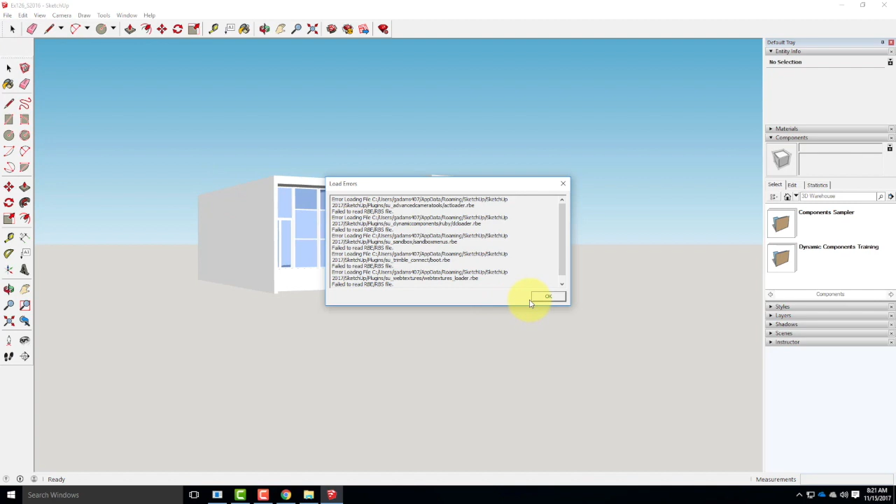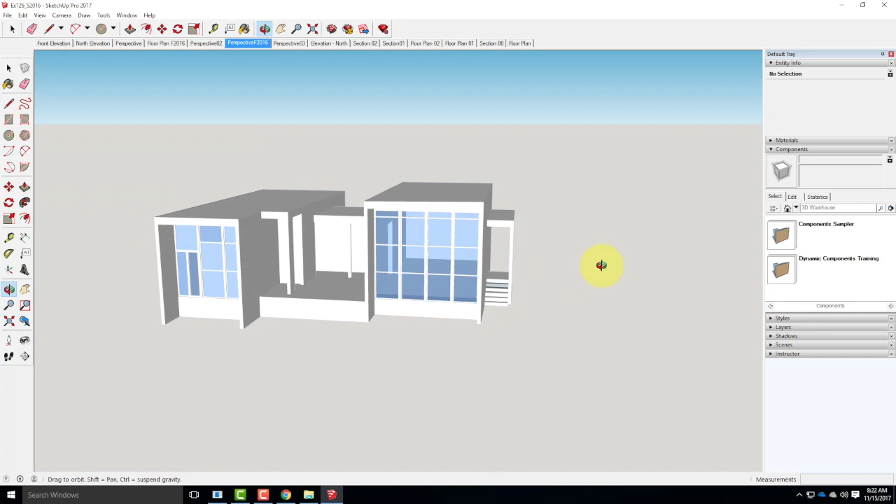Okay, so I have my SketchUp model. I only modeled the front side here because that's the elevation I'm going to be working with. The back side is not done, so you get what you get. Anyway, I'm going to start setting up an elevation view of this particular building.

So obviously I can get in close and say, okay, well that's kind of like an elevation view of this building. Let me switch the styles here into hidden line, just so you can see it a little bit easier. Okay, so there's the hidden line view of this.

But notice that this is technically still in perspective. See how these lines inside the building recede back? Likewise, that's receding back toward a point in the center. This isn't an elevation view. This is still a perspective view.

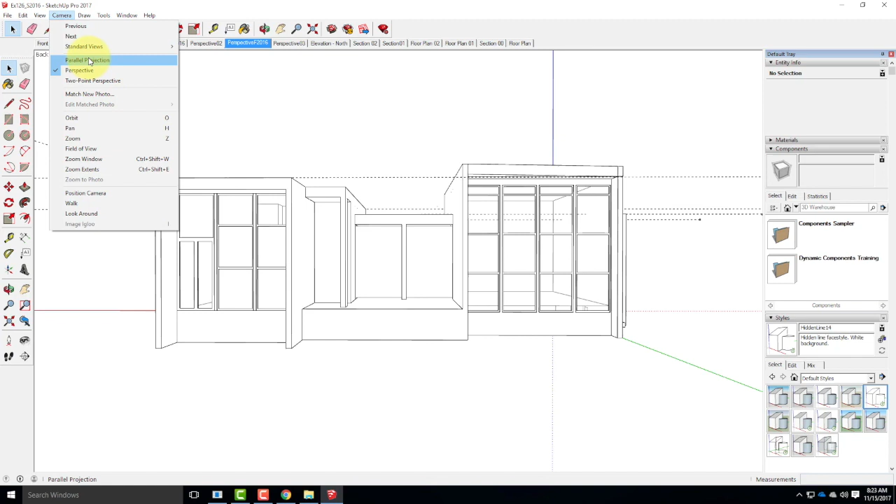So I need to change the view from perspective into parallel projection. I'm going to go to the camera menu and come down here to parallel projection instead of perspective. When that switches, you'll see your building, rather than having lines recede, everything is straight. Does that make sense?

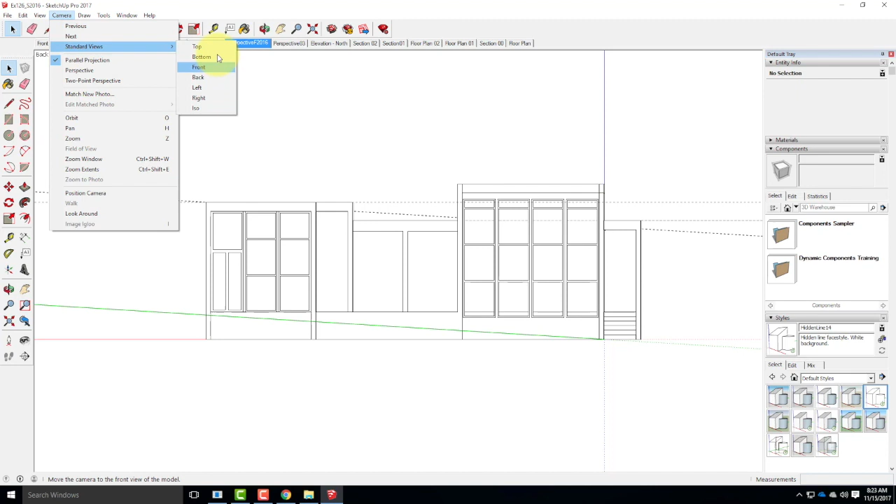I still need to get this lined up so that it's perfectly in elevation view. To do that, I could keep moving it and moving it, and that's obviously close. But it's faster if I go up to my camera, go to standard views, and pick one of the standard views. It's probably the front—nope, it's the back. Standard views, we'll go front. No, sorry, back. There it is, so there's the view that I want.

And when I'm in this view, it makes it much easier to have it perfectly centered in elevation. So there's my elevation view of this side.

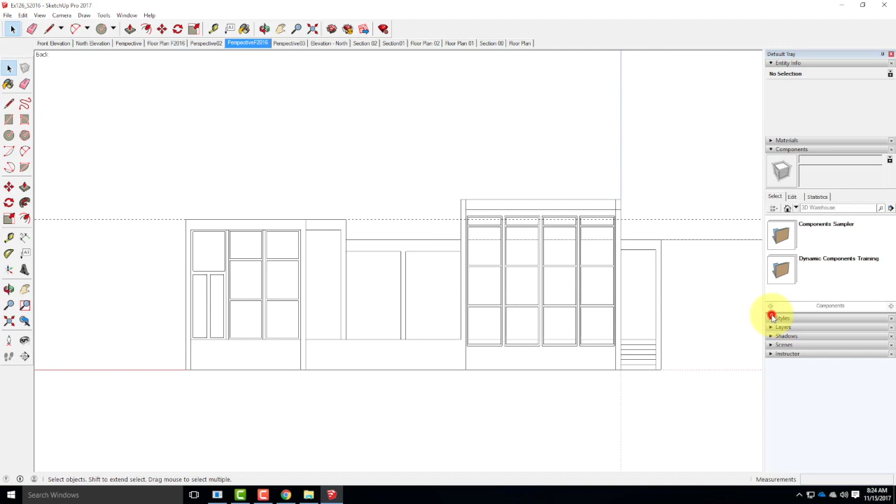Just like I did before, I want to make sure I save this scene so I can reuse it over and over again. You see up at the top I have a bunch of scenes already set from previous classes. I'm going to go over to my scenes window here. Remember, if you're not seeing this, you can go to Window, Default Tray, and then turn on Scenes.

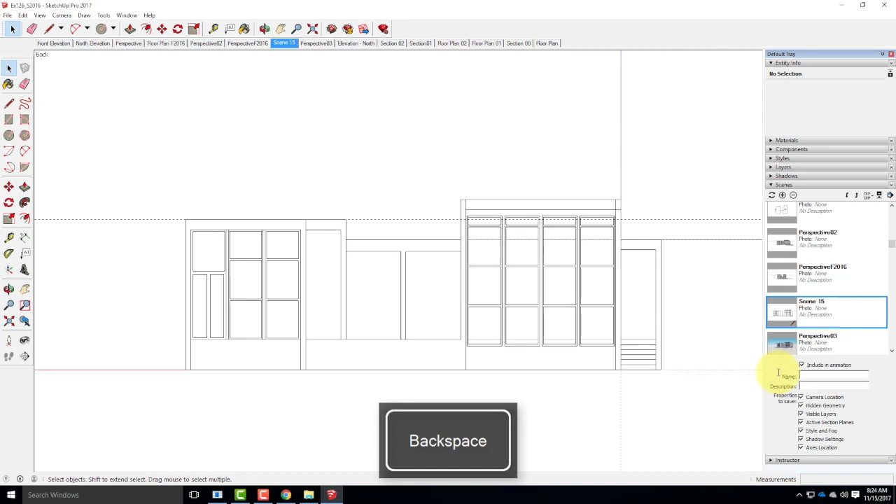I'm going to go ahead and save this scene, and this scene is going to be front—what is this? This is the north elevation. Okay, so I give it a little name so we know it's named. There it is. The advantage here is, remember, I can always return back to this view, and it's important that we keep the same view when we do all of our exports for this. So that's saved as a scene.

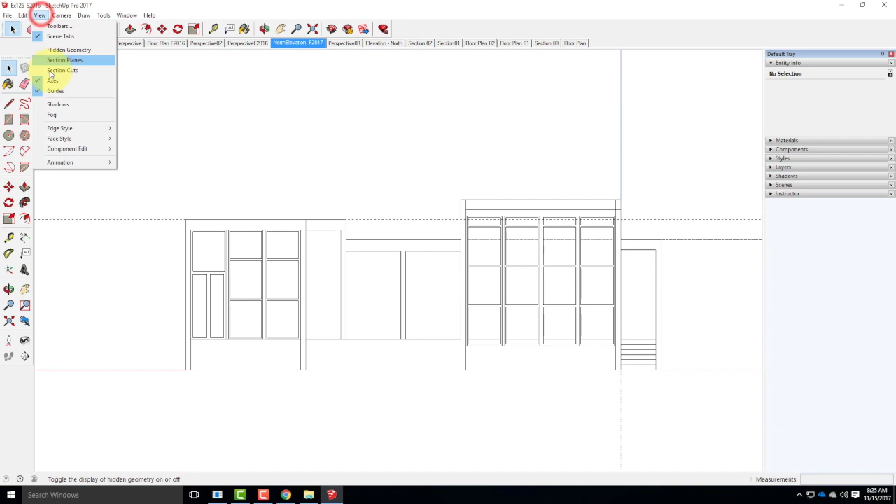I want to get the original line drawing out, but I want to turn off things like the axes—I don't need the red and blue lines, all of that can go away. So I'll go to the View menu here, and I'm going to turn off my section cuts. I'm going to go to View, turn off my axes, and turn off my guides, so that all I have is this very basic line drawing.

Once I have the line drawing, I'm going to go ahead and export this line drawing. I'll go to File, Export 2D Graphic. We're going to save this as a JPEG, and I need to put it into today's folder.

All right, this is—and I'm going to add underscore 'lines' to that so I can keep track. This is just the lines. I'm going to click on my options first, make sure my view size is rather large—in this case I chose 5,000 pixels wide, and the height is whatever it is. I'm making sure I'm on best quality. I'll say OK, and then I'll go ahead and click on Export.

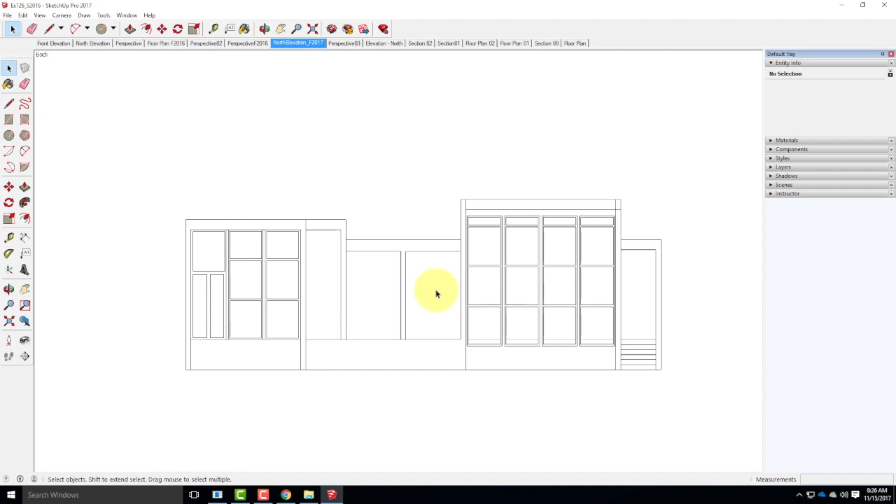So it then exports my line drawing. At this point, I'm going to go through the rest of the export options. We've been through this strategy before—you guys did it with the Francis Ching Cube House.

I'm going to go into my styles here, move over to the Edit tab, and go to the Faces, or Face setting, and I'll turn on X-ray. You don't really see much in the elevation view—there's a little bit there. I'll go ahead and export this anyway.

Export 2D graphic, and this is going to be named X-ray. Export.

Now the next one, I'm going to turn on the shadows. I'm going to skip the guides because the guides didn't do much for me—I say in the tutorial that you should do one for guides, but I didn't use guides, so it's kind of a moot point. I'm going to go ahead and turn on the shadows, so I go to View and then Shadows.

If I'm not seeing anything, I may have to go and adjust the time of day. Let me go into Shadows here and see if I can get something to show—did it not? How convenient, I'm getting no shadows.

There you go, I was on X-ray still. I had to turn off X-ray. So X-ray's off, now I can work with my shadows. And I'm going to adjust things.

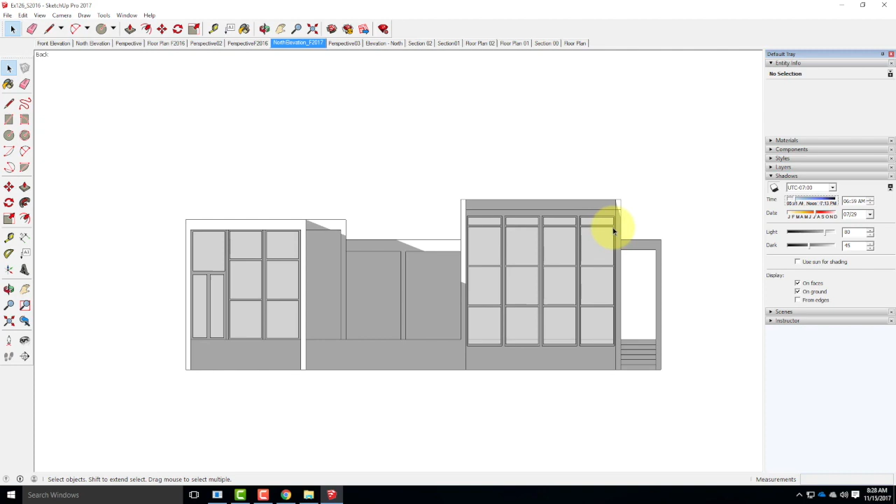But remember, I don't want the lines exported with the shadows. I just want the shadows. So I'm going to go back to my styles here, go to my edge settings, and turn off edges so that I end up with just the shadows being exported. So this is only the shadows.

I'll go to File, Export, 2D Graphic, and I'll call this shadows. And I'll export. Remember, I haven't changed the view at all. It's exactly the same view, and that way they'll line up when I bring them into Photoshop. It's really important not to change that.

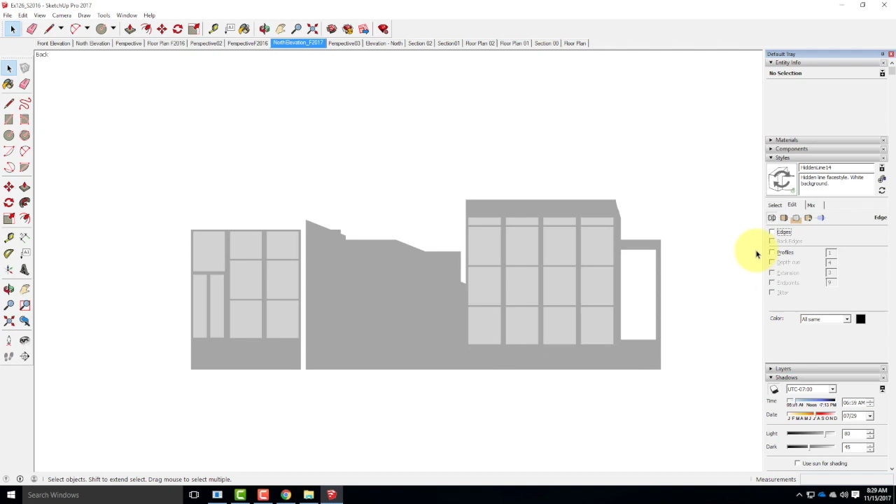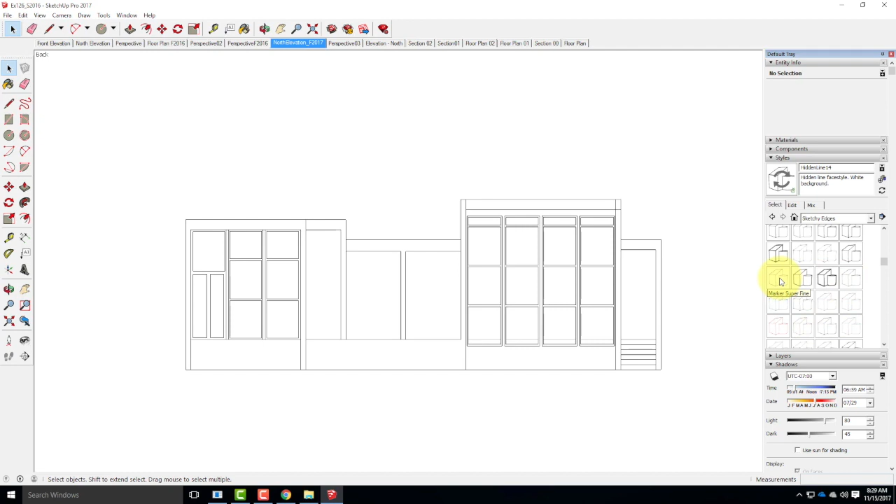So we'll go ahead and turn the edges back on now, and we can turn the shadows off. I'll uncheck the shadows. And now I'm going to go into my Sketchy Edges style, and I'm going to pick a few as part of my export. The pen gray was a good one, if I can find it. Of course, I can't find it.

Remember, with any one of these, if you find one that you like and feel is a good one for you, you can do that export as well. There's the pen gray, there we go.

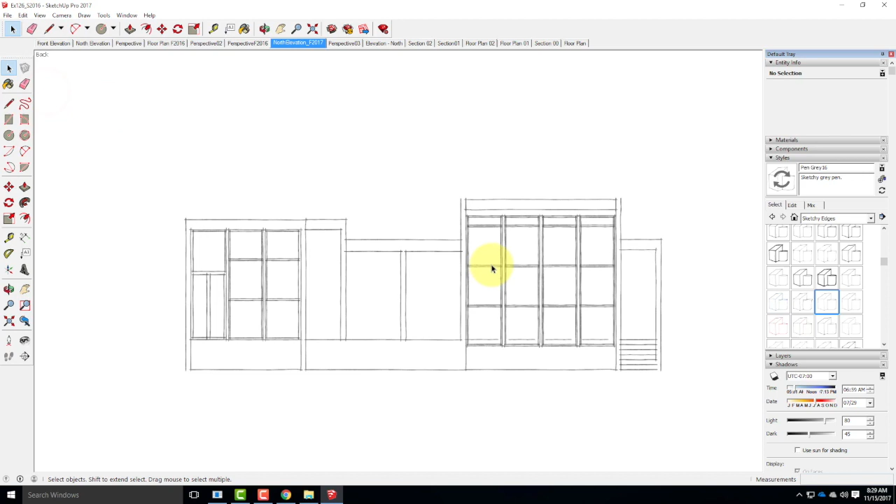I'm going to once again turn off the section cuts, the section planes, the guides, so that I'm back to just a line drawing. This is the pen gray, so I'll go to File, Export, 2D Graphic, and I'll call this pen, and I'll click export. Feel free to experiment if you want to try a different look.

There's nothing wrong with that. I've also found that the airbrush with endpoints works nice, even though it looks heavy here.

Once again, I have to turn off the section cuts, the section planes, and the guides. So I'm down to here. This is airbrush. I'll go to File, Export, 2D Graphic, and I will add airbrush to that one.

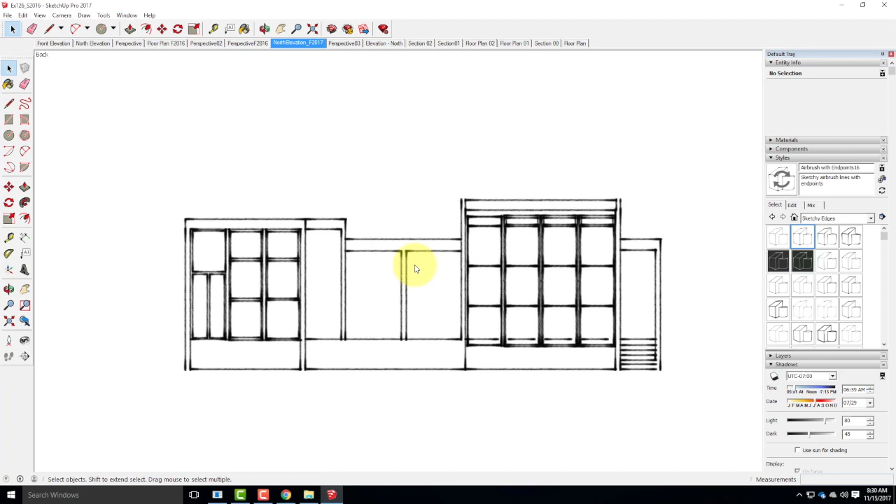So now I've gone through and created all the exports that I need as part of my design here. Now it's time to bring those over into Photoshop and stack them up. So I'm going to go ahead and close off SketchUp for now. I can always come back. I saved the view. If I need a new export, I can do that.

And I'm going to go ahead and open the first image in Photoshop. So let me open up Photoshop here. I'll go to File and then Open. I'll go to today's folder, and I'll take the lines first. There's the lines, and I'll say Open.

Now with all of these, I know it's a little hard for you guys to see this because it's a little faint. But with all of these, remember, I want my background unlocked. So I'll right-click and say Layer from Background. But I also want to name this. So this is my lines.

And for your purposes, I'm actually going to duplicate the lines and change it to multiply just so that they show up a little darker on the screen. You don't have to do that, I'm just doing it so that you guys can see it a little bit better. And I'll call this one Lines 2.

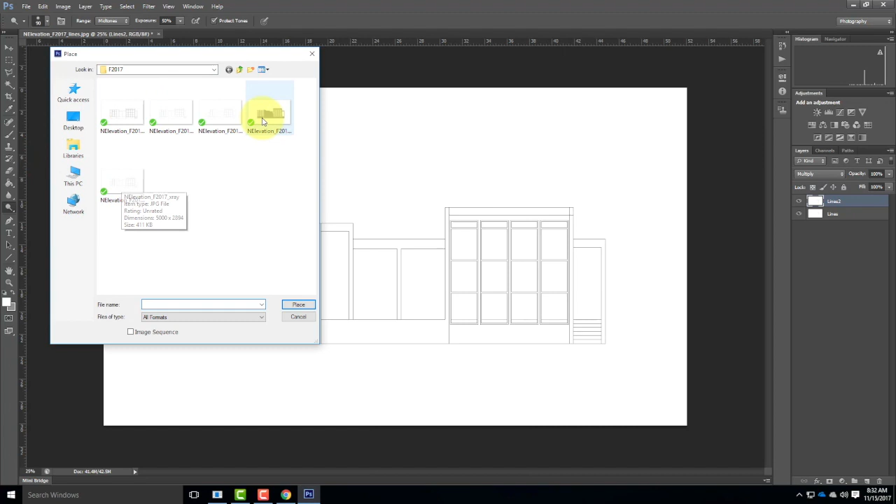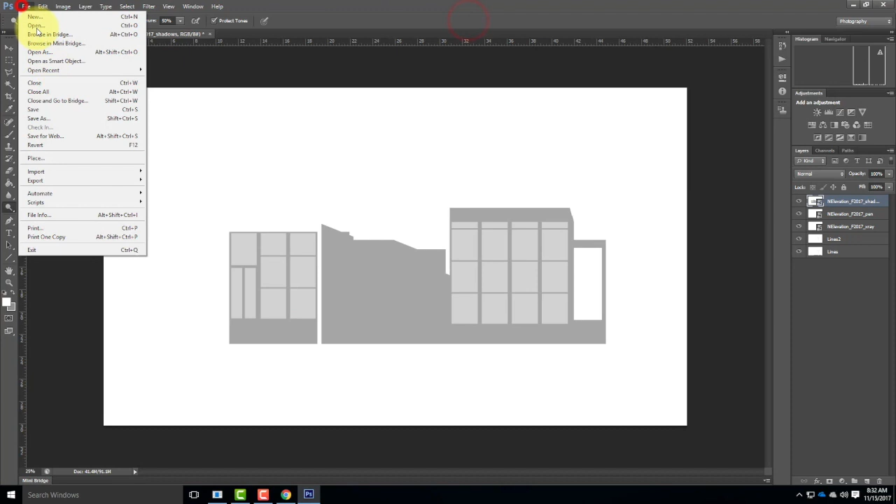Then I'm going to bring in the other drawings. So I'll go to File and then Place, and I'll bring in each of the rest of these. We'll start with the X-ray, I'll place that in. I'll go to File and then Place, and I'll drop in the pen. Yes, you will have to select place every time. Here's the shadows, and the last one was the airbrush.

There we go. So on each and every one of these, after I've finished placing them in, I'm going to take the layer and change it to be multiply. And each time that I do that, we'll see through the white part of the image to the dark part of the image. So even that by itself, you guys can see the building really well.

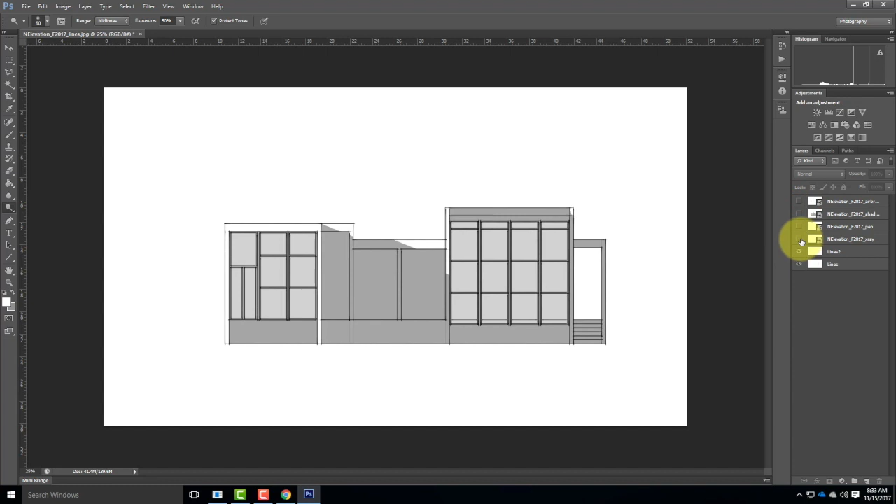But I have control, just like I did with the Francis Ching example, I have control of individual parts of the building. So let me go ahead and turn all of these off for just a second, and I'll work with just the lines layer there. The first thing that I need to do in an elevation is establish where the ground is in the elevation. So I need to draw in where that ground plane is going to be.

So I'm going to create a new layer. I'll click on the new layer button here. It's going to be at the very top of the layer stack, which is where I want it to be. I'm going to rename that to be ground.

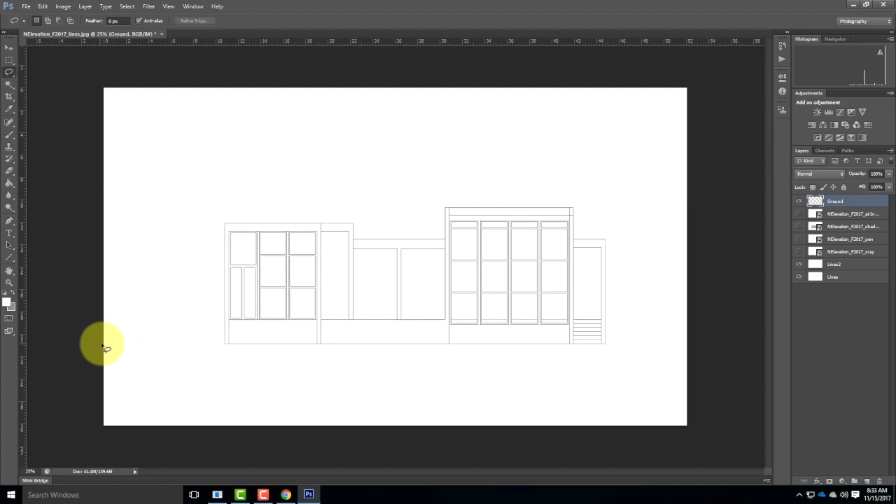And then I am actually going to paint in where the ground should be. You can do this using just your brush tool. I tend to use a lasso tool to start, just to make a selection, because this lasso tool allows us to have a little bit of undulation as we go along. So I'm going to move my way along here, and then I'll eventually drag all the way around, which makes a selection. I dipped a little bit by accident below the bottom of my building.

I can add to the selection by holding down Shift. Notice that the lasso adds a little plus sign next to it, which means I'm adding to it. And I can come back in and say, you know what, I wanted to include a little bit more of that part there. Maybe a little bit more right in there. So I'm just adding to the selection.

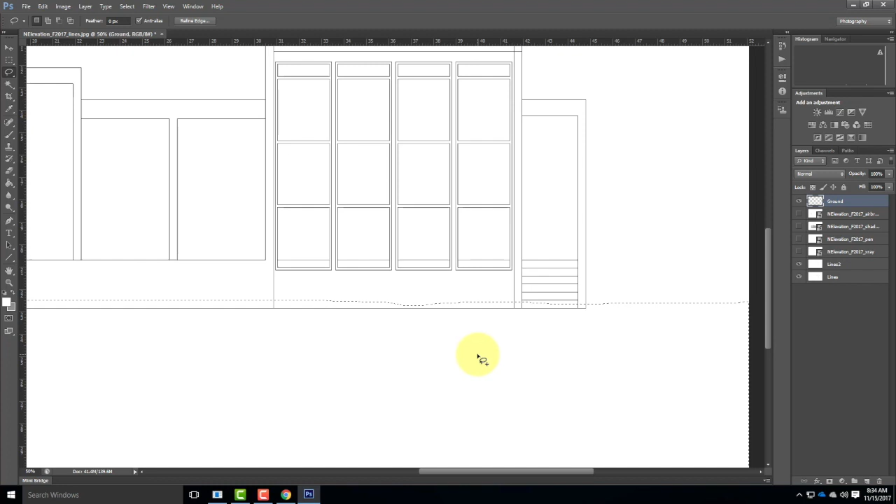If I press Control 0 to see everything, now I'm going to paint in what I want this ground to look like. And there's a couple different strategies for the ground. I could start with a dark gray or a black, or I could do the inverse where the ground is white. It depends on whether you have a colored sky background or not. So I'll end up showing you both as options.

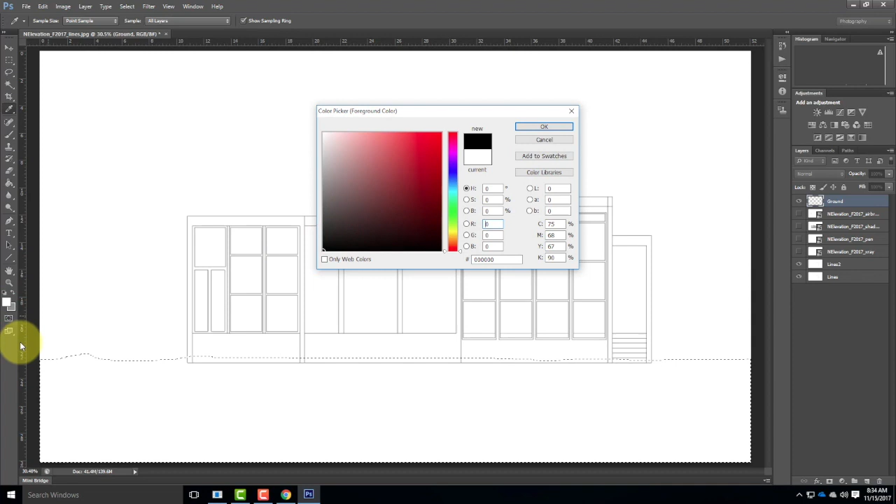I'm going to start by painting this in black. It ends up being a little easier to see initially in black. So let me pick black as my foreground color. So there's black as my foreground color. I'm going to use the paintbrush tool right here. Right now my brush is really tiny, so let's make that brush size go up a bit. Remember, I could also use the bracket keys on my keyboard to make that brush go up a bit. And then I'm going to paint in black that ground.

The advantage of doing it as black is, remember, I can always do an adjustment on top of that and skew it towards gray. I can lighten that after the fact. And I can again show you that as we go forward. So that's nice, I have a little bit of what the ground would be like. And again, I interpreted where the ground would be a little bit. It's covering up the bottom of my building rather nicely. But it would be nice if there was a little bit more to the edge.

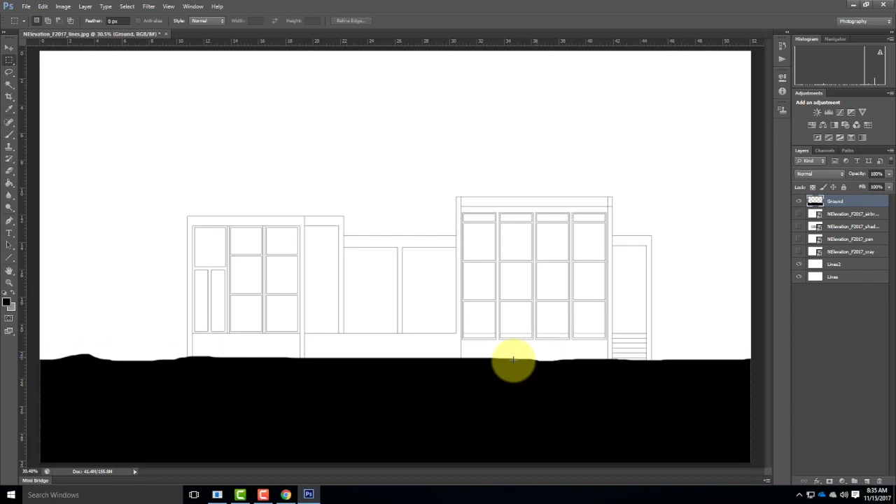And I'm going to use a grass brush using a clone stamp to fill in that edge so that it's a little bit softer against the front of the building. So let me zoom in a bit. And I'm still working on that ground layer over here. I'm going to go to my clone stamp tool. And it's important you use the clone stamp tool, not the brush tool. I'll use clone stamp, and I'm going to make my brush be the grass brush, which is number 134 here.

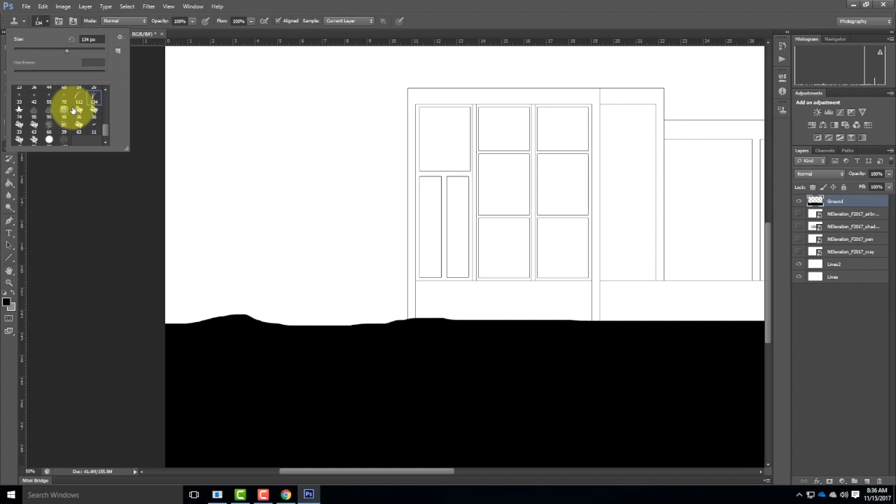It's possible that I'll have to adjust the size of the brush. I'm going to go ahead and hold down the Alt key, the Control key, the Alt key - it's the Alt key - to copy from here, and I'm going to move up toward the edge. So we can see my brush now as I get a little bit closer. Yeah, it's about right in its size. And we'll start filling in the grass along that edge.

Remember, you use spacebar to pan. As I get toward the edge here, I may have to reset where I'm copying from. This is all black, so it's easy to copy from. I'll copy from a little bit further over so I can go right off the edge there. Then I'll work my way over a little bit more. I'll reset, I'll hold down Alt to copy from, and we'll keep working right in here.

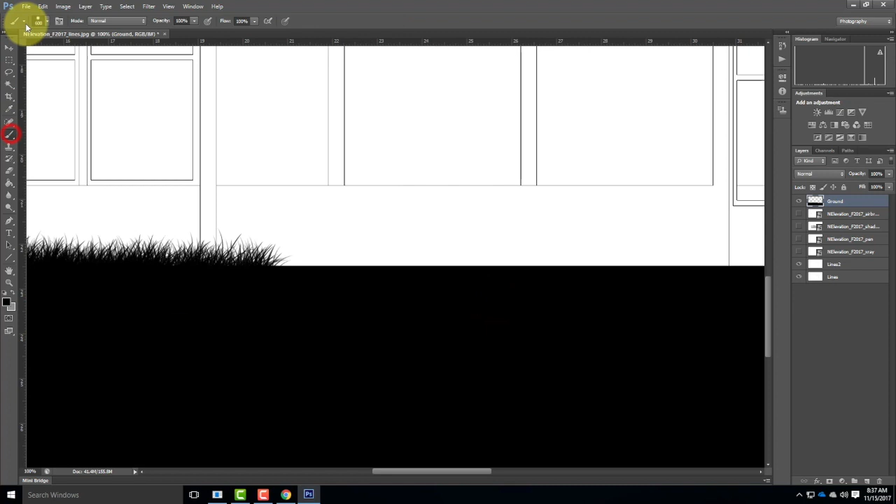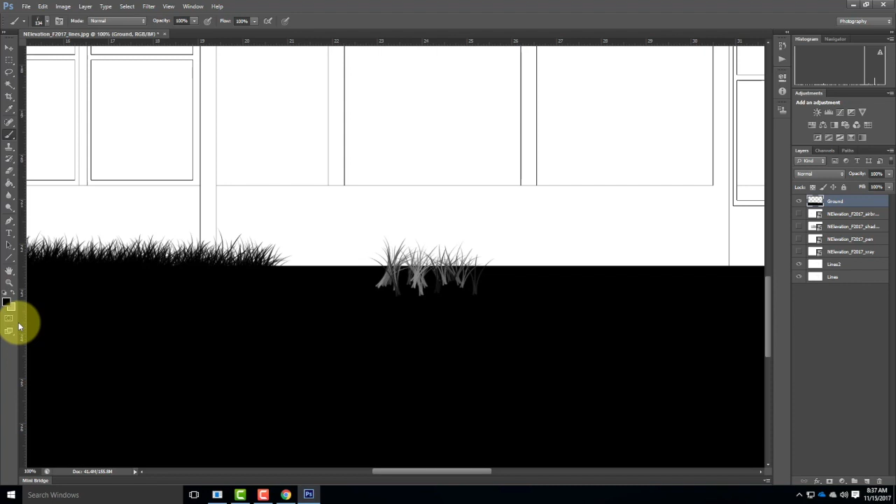Are you doing copy from instead of just black? I'm doing a clone stamp because that's copying the exact color. If I did a regular brush, I'll show you this - if I did a regular brush with the grass brush here, when I went to paint it, you'd end up with these varying colors. That's how the grass brush works, because it's trying to make it look like, if you pick green, it would look a little bit more realistic. I'm picking, the colors that I have are black and gray. If I pick greens, it would try to create fake grass from those greens. I don't want that variance in colors, so that's where the clone stamp comes in, which allows me to copy an exact color. So I'm only working with black, and I'm copying that black in.

One other thing I should point out while I'm finishing up this: if you watch videos from previous semesters, it's entirely possible I'll do these steps in a different order. It just happens to be this is the order I'm going in today. It doesn't really matter what order you do the steps in, because you'll end up with the same result.

Let me continue working my way along here. Remember, as I get to the end, see how my copy from ran out of space? So I got a hard line right there on the edge. I need to come back, copy from over here, and finish off that particular section.

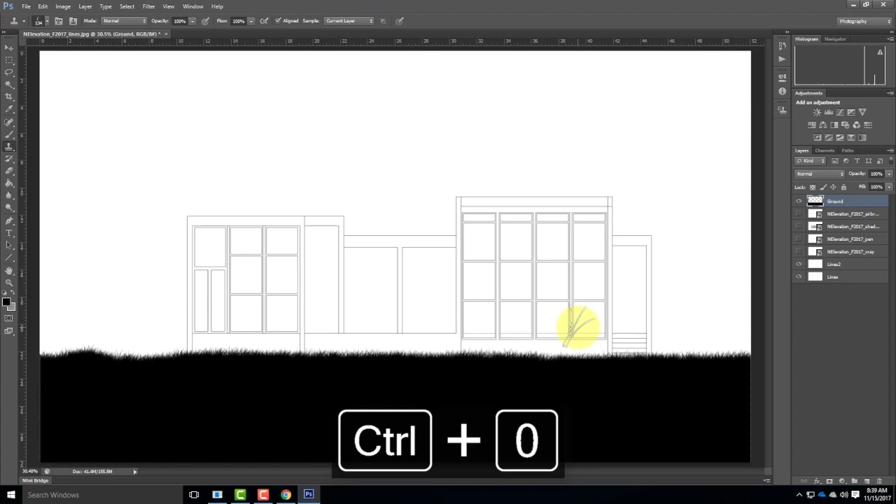OK, so now if I press Control-0 and look at this, we see I have a nice, strong ground presented for me, which is obviously the idea. I did not change the ground to be a multiply layer — it's just a normal layer, so it's on top of every other layer and I can hide stuff behind the ground. So when I go to put a sky in, for example, I can hide the sky behind the ground. So the next piece of this is to put some kind of background as part of this image.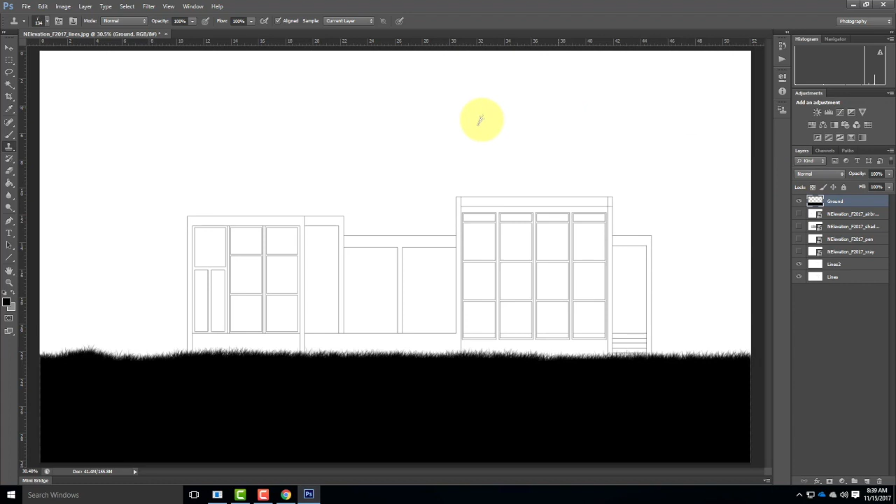So I need to actually go find some kind of background image. If you were actually doing this project, you'd go to the site and take your own images, which would certainly help. For our purposes, we have to find one online. So I'm going to do a Creative Commons search.

In Flickr for Yosemite — Yosemite Meadow or Valley or something like that is not a bad place to start. Remember, a lot of the work in doing this is finding the right image and figuring out where the right image belongs. Something like this, while it's a really beautiful image, doesn't work for my elevation.

There's a building in the background. There's a fence randomly through the center. If I put this behind my building, it would look funny. The scale's wrong. So I need to be selective about where I'm picking and what's going to show up in my particular view. This image would work just fine.

A lot of times when I'm doing this, I'd go through and just open them in new tabs as I look through a couple pages of images, trying to find which one would work nicely. In our context, I can pay a little attention to my shadows, which is not a bad idea.

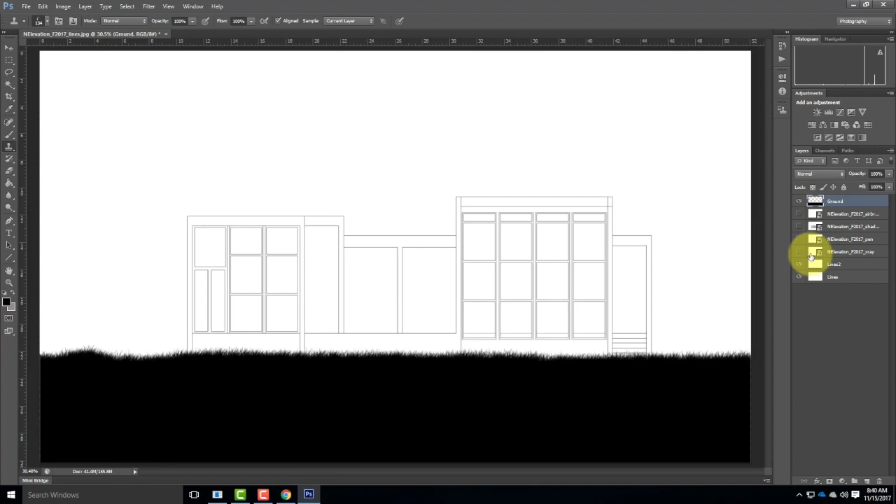So if I look here and I look at my shadows — where's my shadows? I should have renamed these layers. There's my shadows. I've got light coming; the sun would be a little bit behind the building over here, shining down.

As I'm looking through my images, it would be helpful to have a general understanding. This image, for example, has the shadow coming from the opposite side. I could flip the image — that would work. But it's good to be aware of that sort of thing. When we get to the perspective, it'll be far more critical. So this one, for example, does have the shadows coming from the right direction, so that might not be a bad strategy.

I'm going to look through a few more here. One of these ought to work. So where was the one? OK, so this one had the shadows coming from approximately the right direction, so we'll see how this one works. This obviously isn't exactly the site — I'm picking something that's close. So let me go ahead and download this.

Oh, the size is really bad here — it's too small for me. So let me move on to a different one. Let's see what the size of this one is. This size is pretty decent.

In this particular view, it's going to be a little tricky because this is looking down valley slightly, and I've got a bit of foreground grass, so I have to make sure I can hide all of that. So I'm going to give this one a shot, and we'll see if it ends up working out for me. It may not — that's one of the things you have to be aware of when doing this: sometimes you'll put an image in and it might not really work. You need to try a different image.

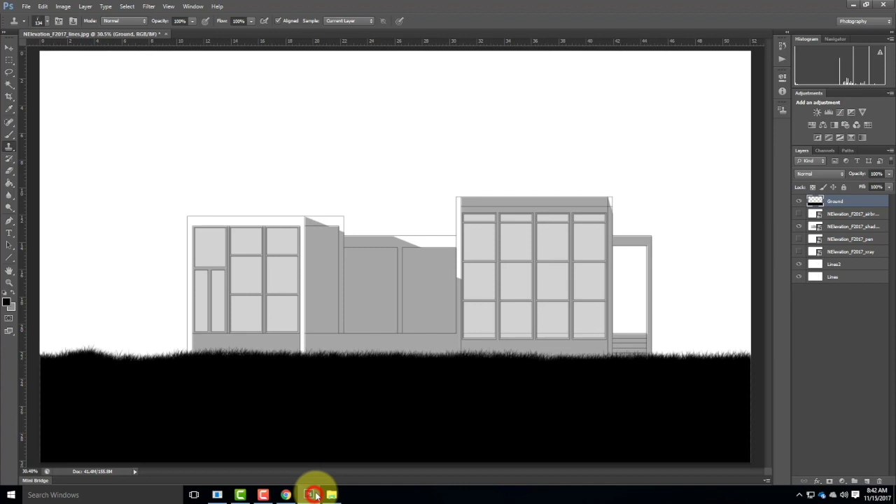Let me paste it. Here we go. I'll jump back to Photoshop, and I'm going to bring that image in. So I'll go to File and then Place. There's my image. Let me zoom out just a little bit. I'm going to have to make it a little bit bigger.

So I'll hold down Shift to keep the image in proportion, like so. I also want that layer to be below the ground layer. So I'll go ahead and commit to the scale, and then I'll make sure that it's below the ground. And then I need to work with the image to figure out where it belongs.

As I'm looking toward this particular piece, so maybe somewhere like that, it might work. We'll give it a shot and see. It may feel a little awkward because it's looking down.

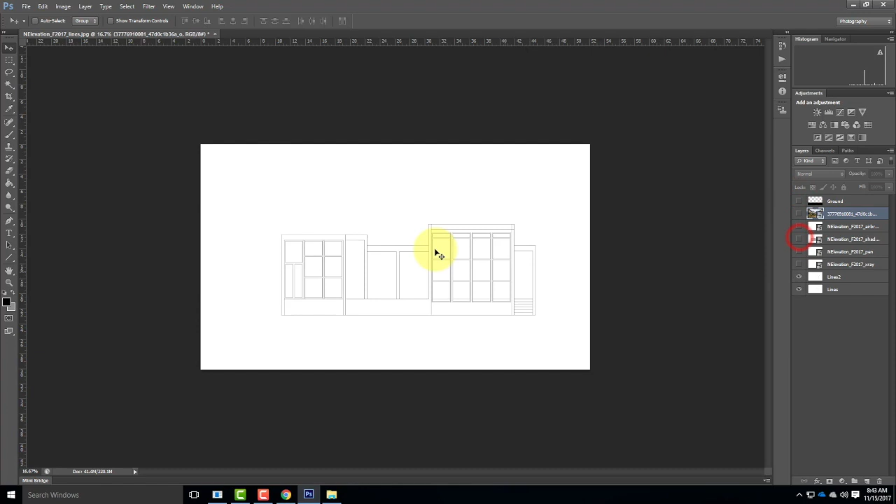So once I have this in place, I need to go in and find my building again. Let me turn everything off, and let me turn the ground off so that I'm back to just my building. I'm going to select, using the magic wand—make sure I'm on my lines layer here—the background. So there's the background. I have one piece of the building where I can see through, this entry here. So I have to make sure I include that piece in the background. So I have everything here selected.

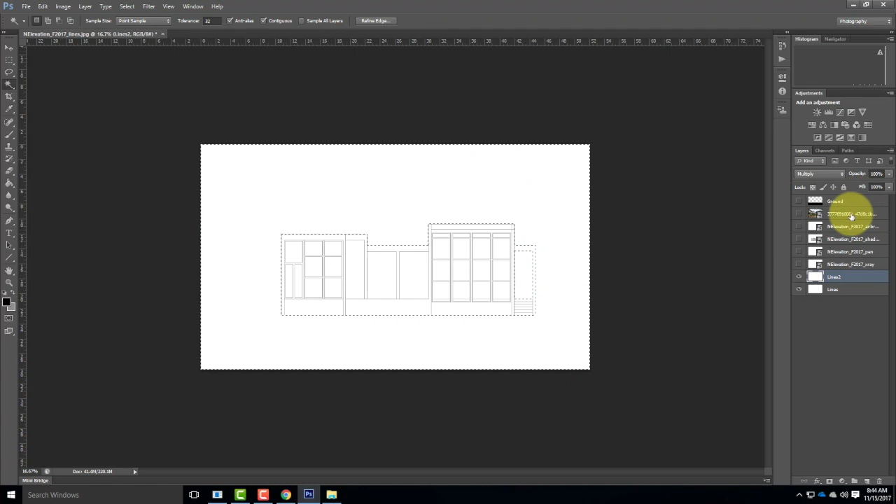If I go back to the background image here, I can do two things: I could just delete the inside part out of the background image, or I could create a mask. So I have the selection already made, so I'll go ahead and create a layer mask on that, which masks off that part of the background image for me.

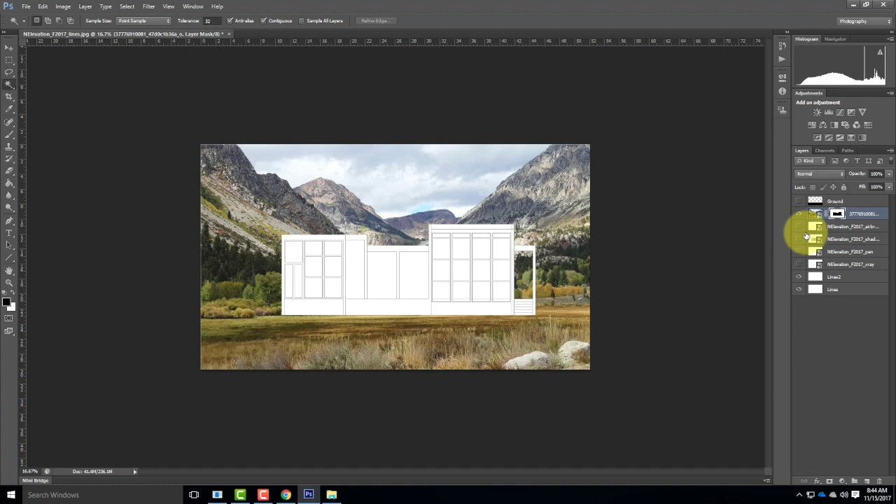Now if I were to turn back on my ground, we can see what it looks like with the building in its context. To me, it's not quite right. The perspective just isn't working for me. And this is where you have to do these kinds of edits—you have to decide, is it working, is it not working? So I'm going to try a different background image and see if I like it better.

So let me come back over here and try this one. I think this one will work a little bit nicer. So let me go ahead and download this one in its full size.

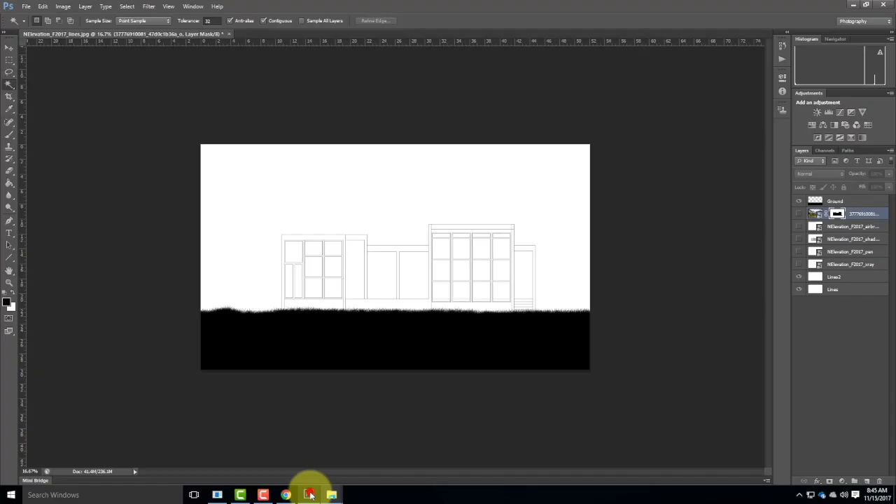And let me copy it. There it is. I'll come back to Photoshop. I'll go to File and then Place, and I'll bring in that other image. This one already feels better.

Make that a little bit bigger. Make that a little bit bigger like that. I'll commit to it.

I can take my mask. I can hold down Alt, and I can copy the mask from one layer to the other because I already created the mask, and we can see what it looks like. Maybe before I do that, I'm going to make a little adjustment and bring that down ever so slightly.

More about like that. A little bit higher. About like that, I think. Then I'll hold down Alt and copy this, like that. So now we're seeing the elevation in context with the building and the ground.

Okay, this starts to feel better. It's probably because the grass in this is about the right length. It's starting to feel like it belongs as part of the elevation view. So now I have that established and set up.

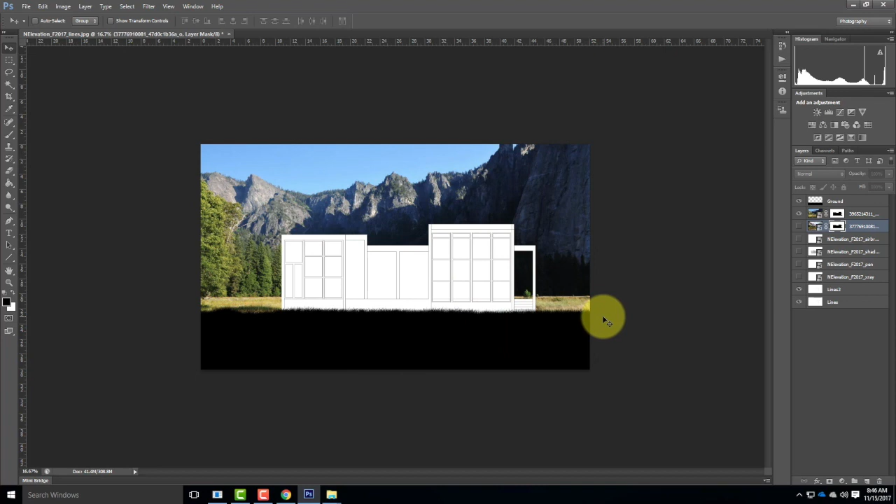I have the background. Remember that I can choose to fade the background or increase the transparency in the background. If it's oversaturated, I could turn the background to black and white. I have a lot of flexibility with what happens to the background. For right now, I'm going to leave it in color and then make an evaluation a little bit later on.

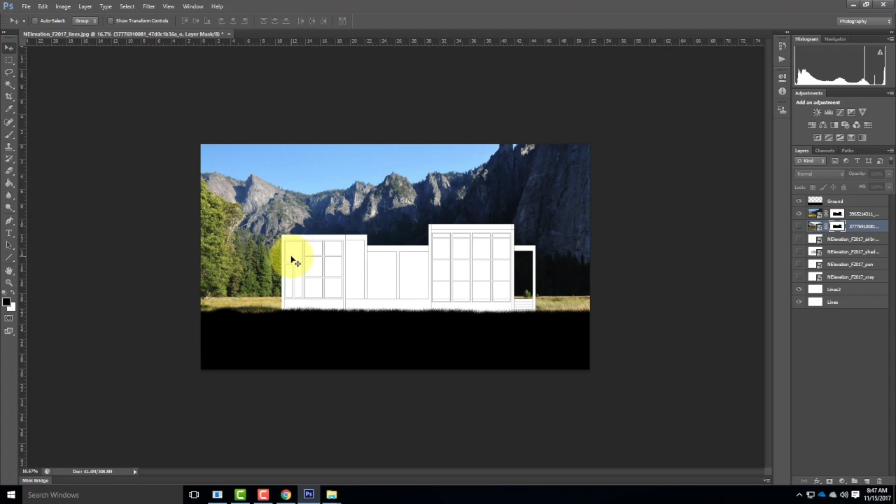So the next piece in this is I have to start to distinguish what's happening to the windows. And I think the next place that would be appropriate would be to work on the windows. So let me zoom in here a little bit. And I'd like to put some kind of a sky reflection into those windows.

So first off, I need some kind of a background cloud scape or something to work from. So let me do a Creative Commons search for high cloud sky. I don't want too puffy of clouds. If you're a cloud expert, you probably could type in the right type of clouds, but I'm not a cloud expert.

Something like that might work. So I'll go ahead and download this image. Copy it. And I'm going to put it into today's folder.

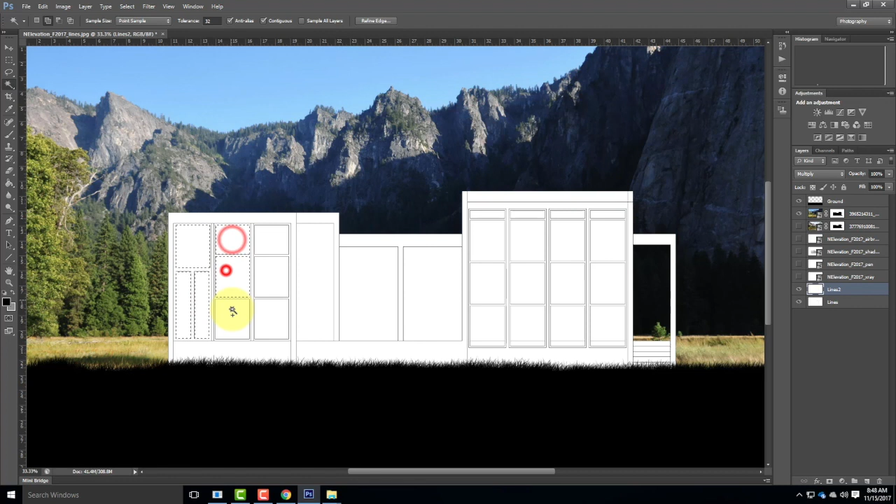And now I need to drop that image into all the windows of my building. So if I switch to the lines layer, I can then use the magic wand, and I can go through and select—I'm holding down Shift right now—all the windows that are in my building.

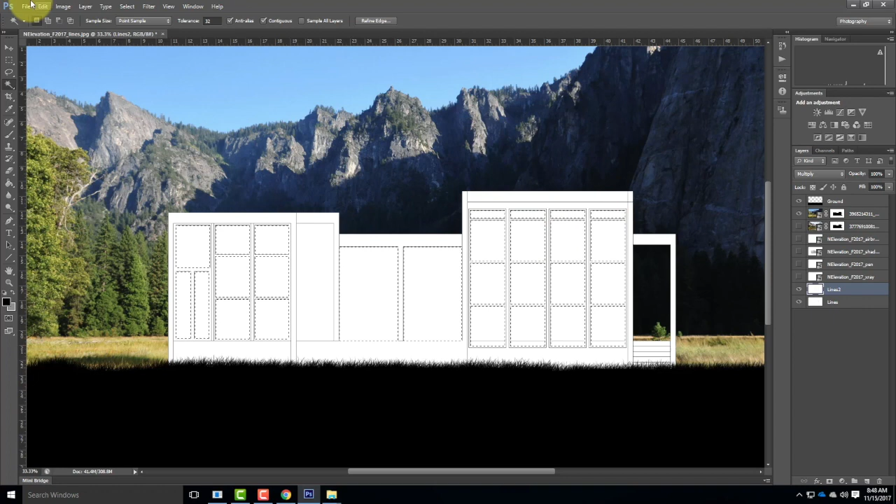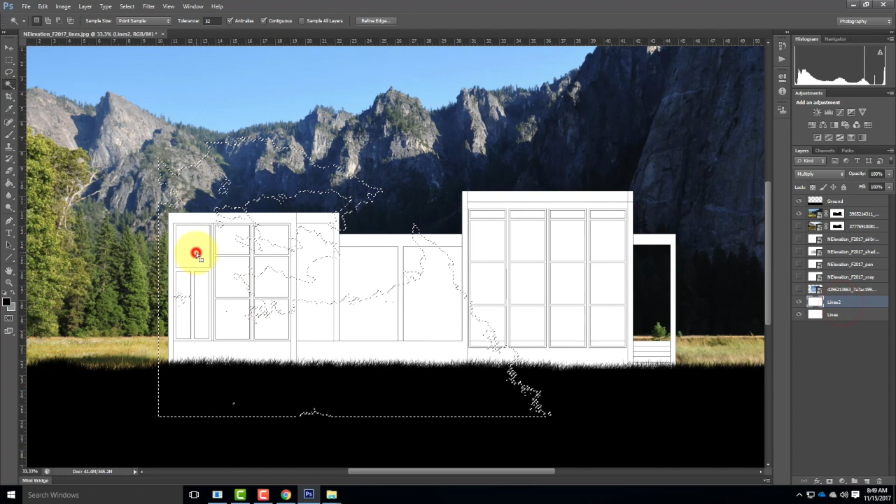Okay, so I have all the windows selected. I'll go to File and then Place, and I'll drop in the sky. Make that a little bit bigger. Like that, or so. Then I need to make a mask on that layer for all of the windows. I shouldn't have made my selection yet, sorry, that was a little early. Let me go back to my lines and quickly select those windows again.

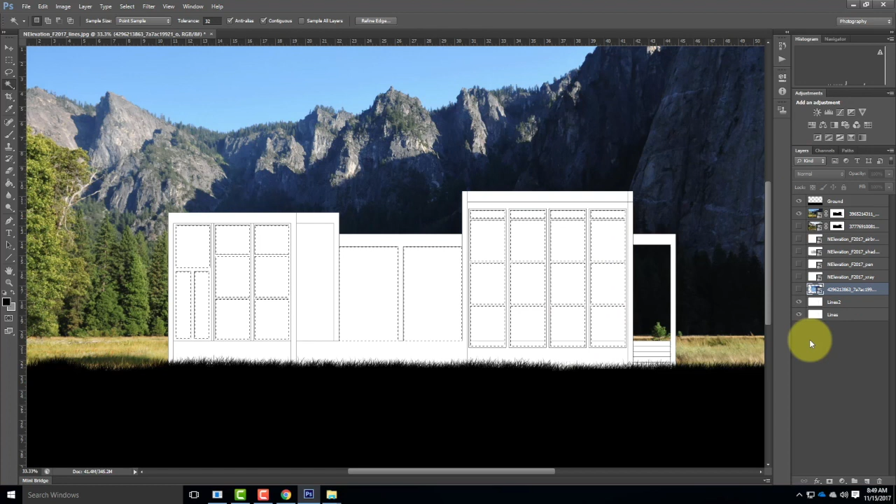All right, I'll go to my sky. I'll click on Add Layer Mask so that we have that cut out for the windows.

Now these windows are appearing a little bit too dark, I think, in context for the lightness of the sky and the general exposure, so I need to make an adjustment for that. Let me add an adjustment layer. I'm going to go to Layer, New Adjustment Layer, and let's do a Hue and Saturation adjustment.

So here's my Hue and Saturation adjustment. I'm just going to drop the saturation down so that these get a little bit less saturation. They're not quite so blue. They look a lot bluer on there than they do here. So I've done that, and I'm going to tie it just to the image. Control-Alt-G to tie those two things together.

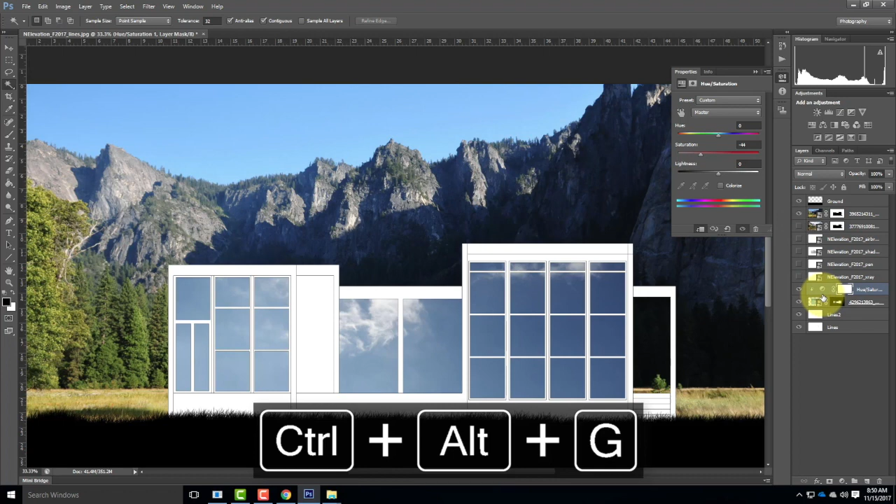I could also make them a little bit lighter so that they're not so overpowering. So maybe something like that is a reasonable compromise.

It's amazing how different the projector looks than my screen. Anyway, if you're watching this afterward, I apologize that it looks so bad here—I'm doing adjustments based on what you guys are seeing on the projector.

OK, so now I have those set up. Now I could go through and continue on with this collage. I could add concrete, for example, to my building. So I could go find some concrete.

Let me look again in Creative Commons Search here. I'm going to search for board form concrete, maybe... concrete texture. Terrible. Sometimes it's about what you're searching for. OK, I'll do this one.

That's fine, so let me go ahead and download that. This looks like a tiling texture—it looks like I might have gotten lucky. I could obviously make my own tiling texture; we talked about that earlier in the semester. Let me copy this and drop it into today's folder.

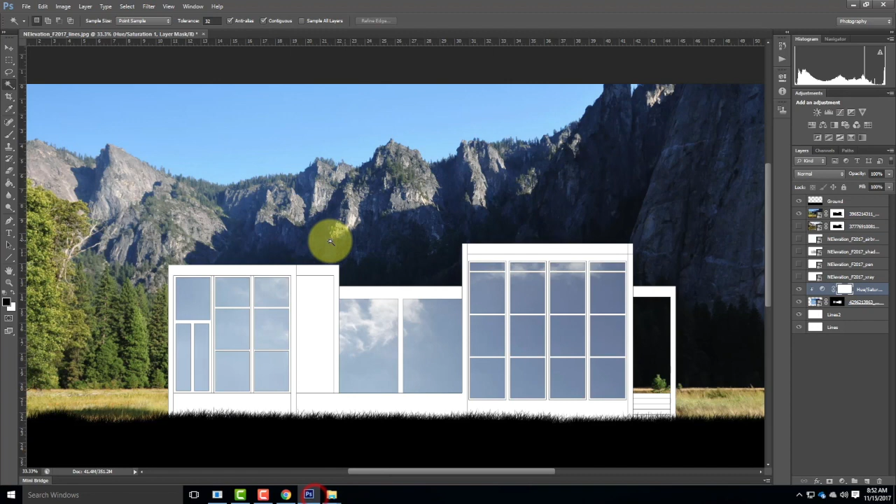There it is. Now I'll go back into Photoshop, and I'm going to place that in as part of this. Now I have to have a general understanding of where the walls change. I could do concrete all the way across, but the problem is there's different depths, so in some capacity I'm going to have to judge what those depths are.

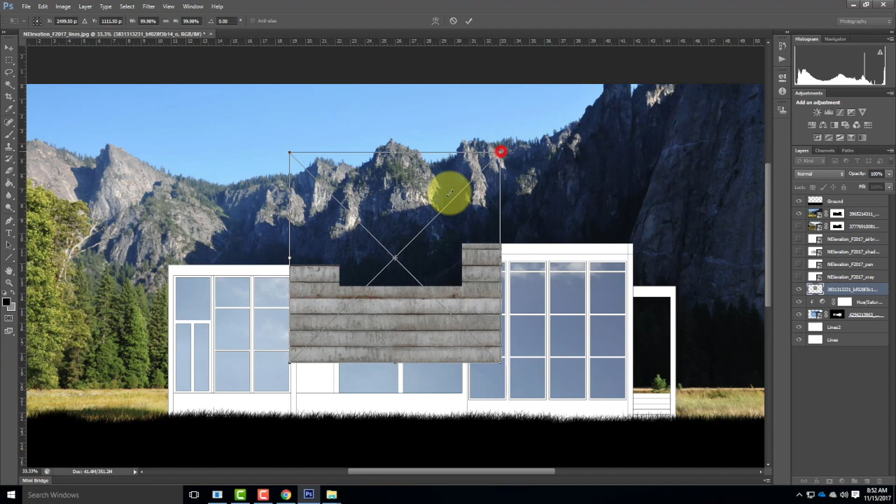Let me go ahead and go to File and then Place. I'll drop that piece of concrete in. Definitely too big, so let's get the scale down appropriately—maybe about like that will work. I'm going to move this over so that it's right about there. I'll commit to it. Now I need lots of these.

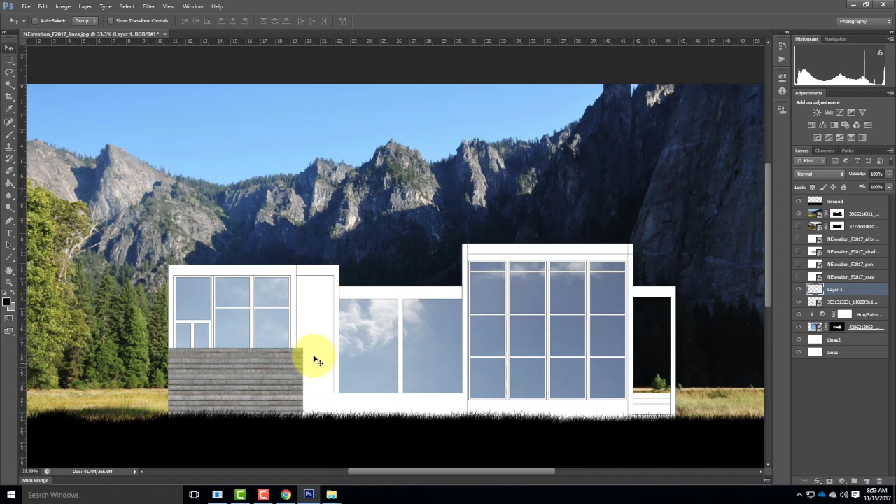So I'll go ahead and make a selection around, doesn't have to be accurate, just around that object. I'll Control-C to copy, Control-V to paste it, and then I can use my Move tool to start to line these pieces up. So I'm just Control-V.

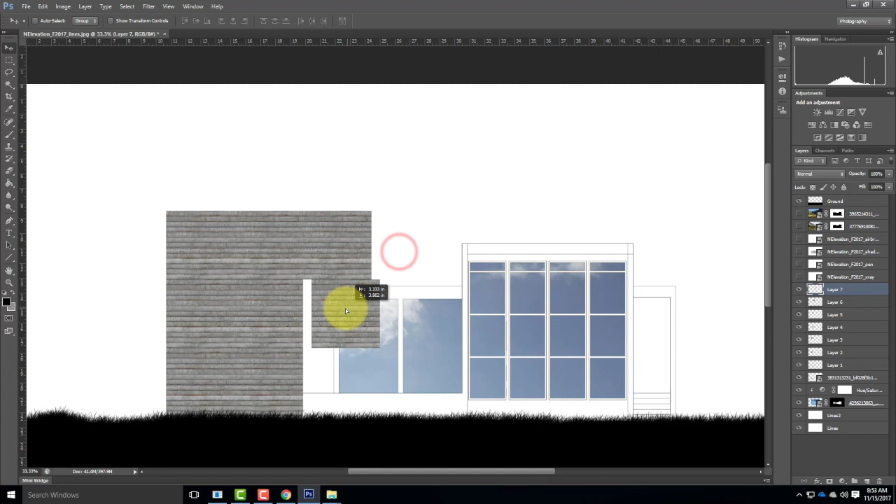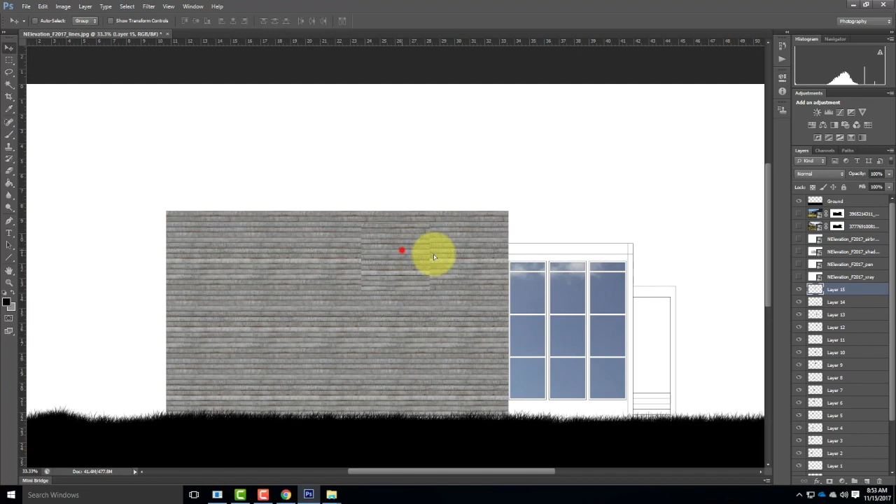Turn that off so you can see it a little bit better—I'm just covering up my building. This is slightly different commands, but it's essentially the same idea. You're not trying to make bigger pieces in Photoshop, no, I'm just tiling these together. Now, this was a tiling texture, so they seamlessly go together, which is convenient for me, but you guys don't need to sit here and watch me make it a tiling texture first.

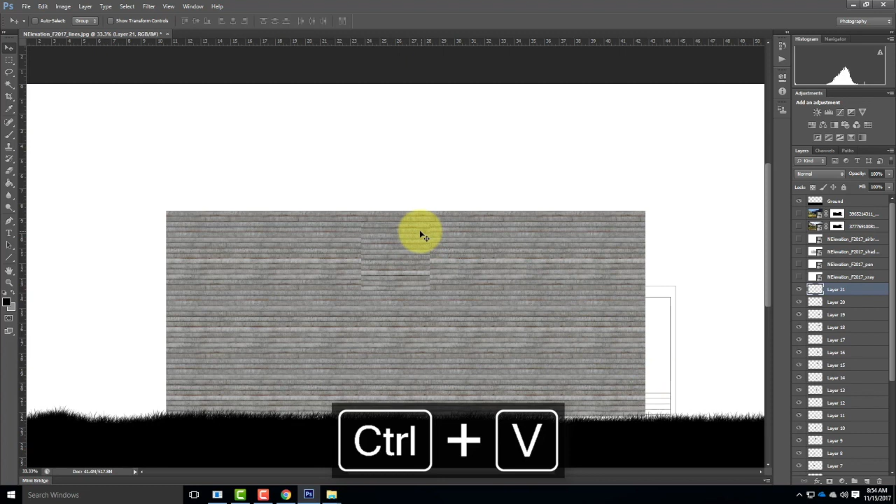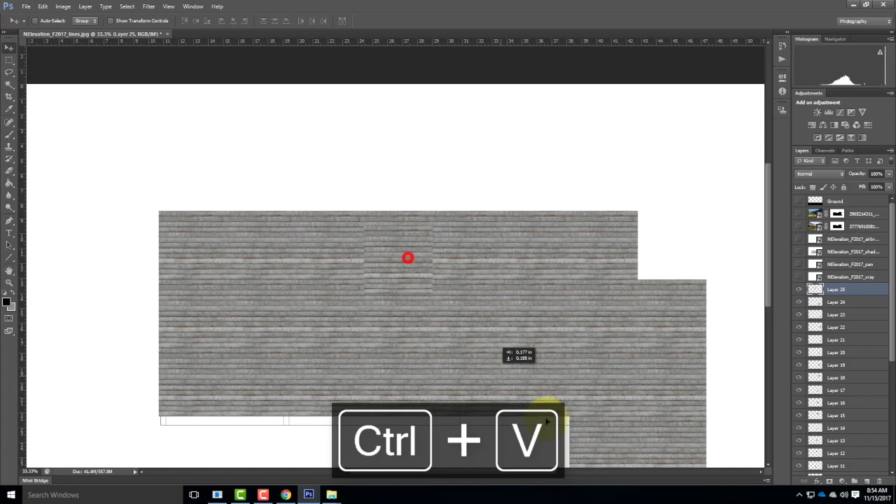So there's a couple little pieces down here that didn't quite get covered. Let me turn off the ground for a second so we can see them. Okay, I think that covers it.

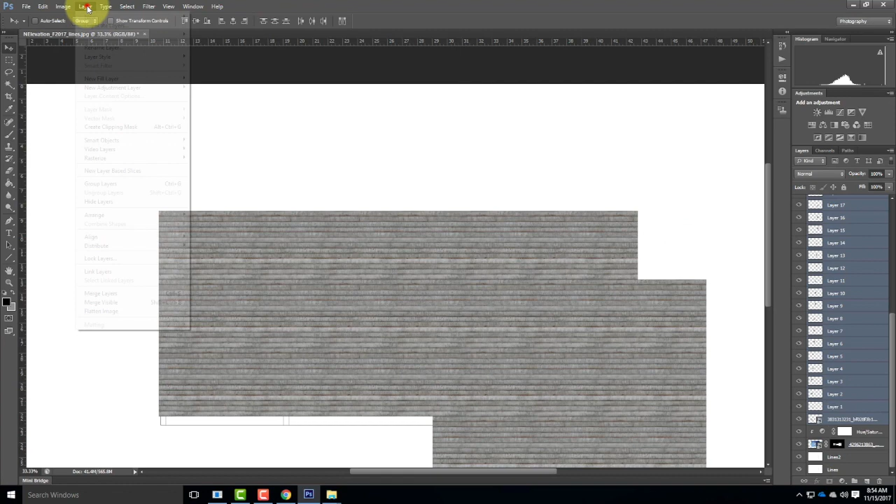So now that I have all of those, look at how many layers it created when I did that—that's a mess. So I'm going to take this layer from layer 26, hold down Shift to the layer where I brought in the concrete to begin with, and then go up to Layer, Merge Layers, which will merge all of those layers into one layer, which is quite convenient. I'm going to rename that to be Concrete.

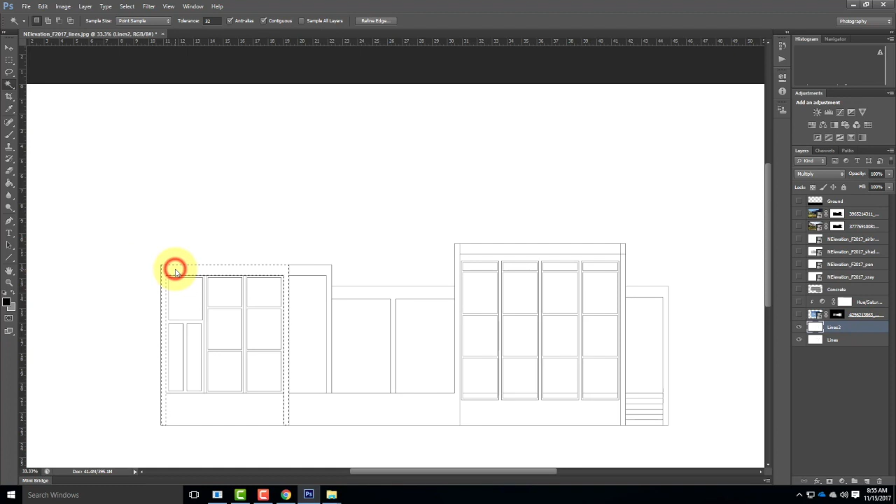And then we'll turn off everything. I'll get back to my lines, and I need to use the magic wand to select the pieces that are concrete. So I'll take that, plus this, plus this, plus that, plus that.

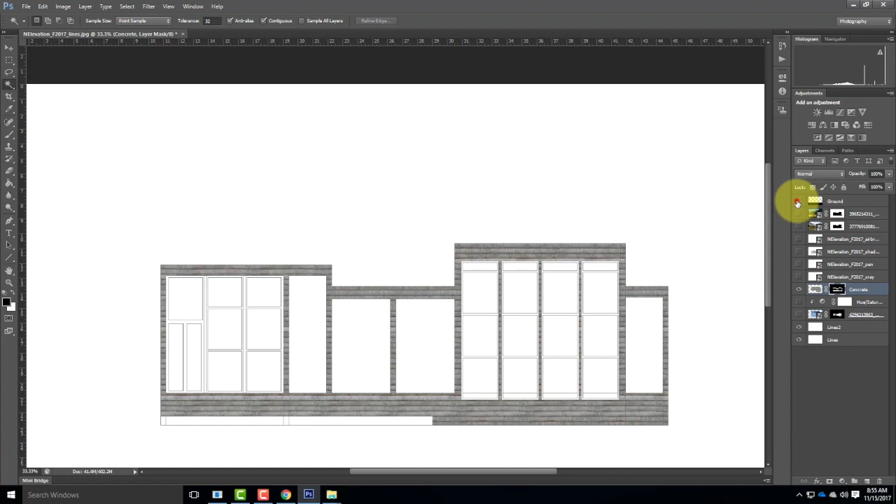So I've created those. I'll move back up to the concrete layer, turn it on, and then I'll create a layer mask so that the concrete falls where it needs to fall. I can turn back on the ground to make sure I've covered it. Looks like I missed a little bit in there, but you guys get the idea, certainly.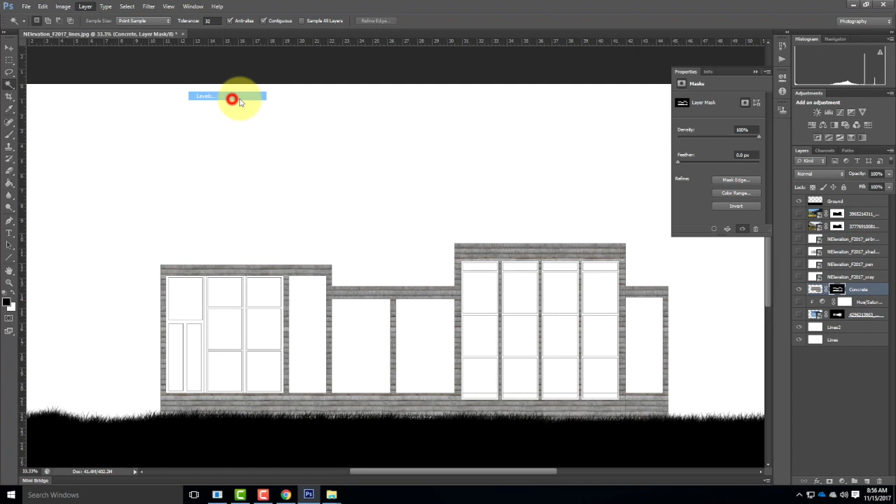Now the color is probably too strong, so I may need to do something to lighten it. Let me go ahead and add an adjustment layer on that. So let me go to Layer, New Adjustment Layer. I'm going to do a levels adjustment on it, and I'm going to tie that levels to the concrete with Control-Alt-G, so I'm just affecting the concrete.

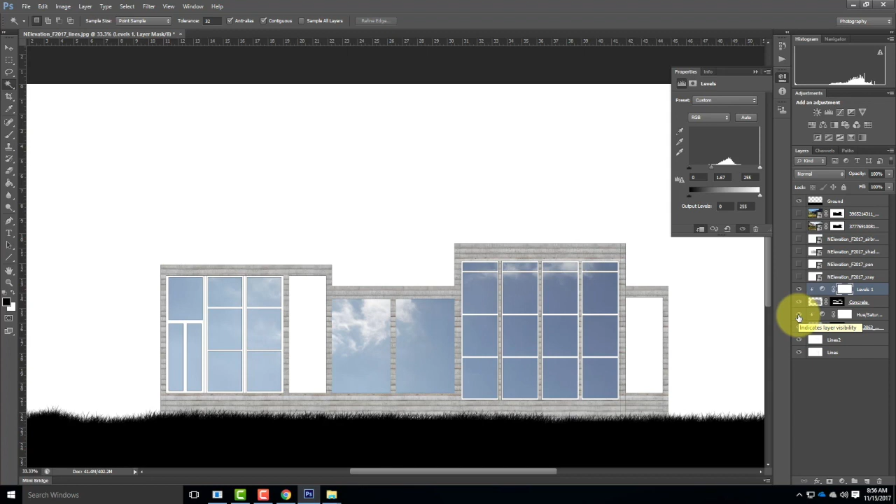And I'm going to change the color to be a little bit lighter. Something like that. So I'm making these modifications as I go along. I could then turn back on the windows so we could see with their adjustment layer on it as well, and then I could turn on the background to see what it looks like. So the rest of this probably needs a little bit more too—it probably needs some wood texture or something to identify those.

This wall in here really is supposed to have a door, so let me go back and I'll just fill that in with concrete for right now. This is the advantage, of course.

I can come back to my layer mask. I can select—let me select it right there. I'll go back to my concrete layer mask and I will paint, not with the grass brush, with a regular brush, with white, so that I get that particular piece back in. Like that. So I'm layering up these pieces.

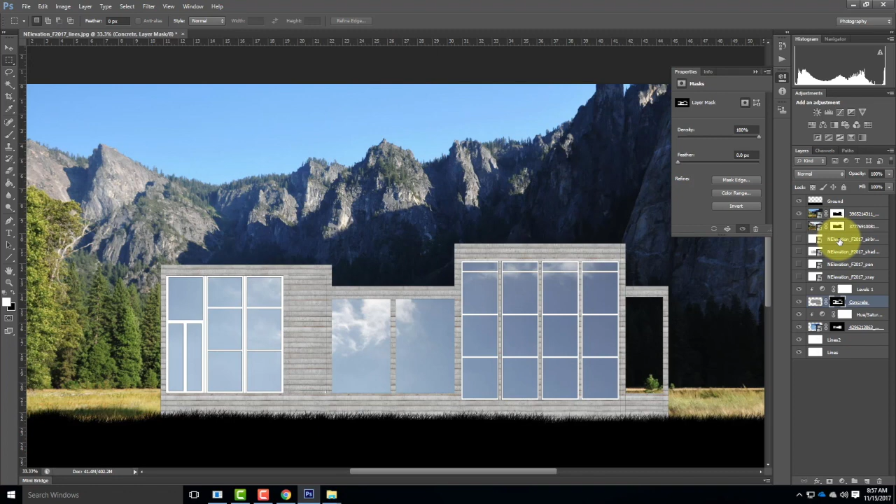So at this point, it's time to start playing around with my other exports from SketchUp. So that was my airbrush. I'm going to turn that one on. I don't think the pen is dark enough.

I don't think I'm going to worry about the X-ray, but I do want to look at the shadows and how the shadows are falling on the building. They might be a little bit strong, so I may need to adjust the overall strength of those. Let me rename this to just be shadows.

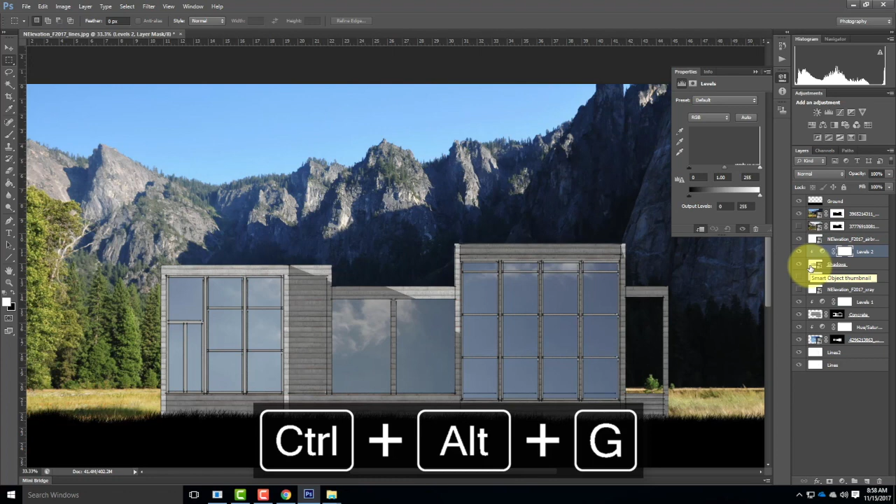And I can, once again, use the dodge and burn tools, or I could go in and use an adjustment layer. We go to Layer, New Adjustment Layer, and I'm again going to do Levels. Control-Alt-G ties that to just the shadows, and we'll lighten those up just a bit. So they're still there, but they're not quite as overpowering as they were. So maybe about like that.

So you can see how I'm starting to build up what this elevation view looks like. For me, the background is still dominating this a little bit too much in the overall elevation, so I want to tone that down just a bit.

So I can do this in two ways. Obviously, I could adjust this particular background and drop the transparency down—I could take this, I could drop it down like that. That helps. Or I could also fade this so that it goes to more transparent.

And this is one of the things that you'll learn as you start to assemble these on a bigger board. We're not going to do it for this class, but you'll end up doing it in your careers as a design student. And that is, do you want your view to be framed out such that it has a border on all four sides, or do you want it to bleed into the next drawings? So if I wanted this to bleed into the next drawings a little bit better, instead of having this sharp top edge, I could bleed this out into transparent or into white.

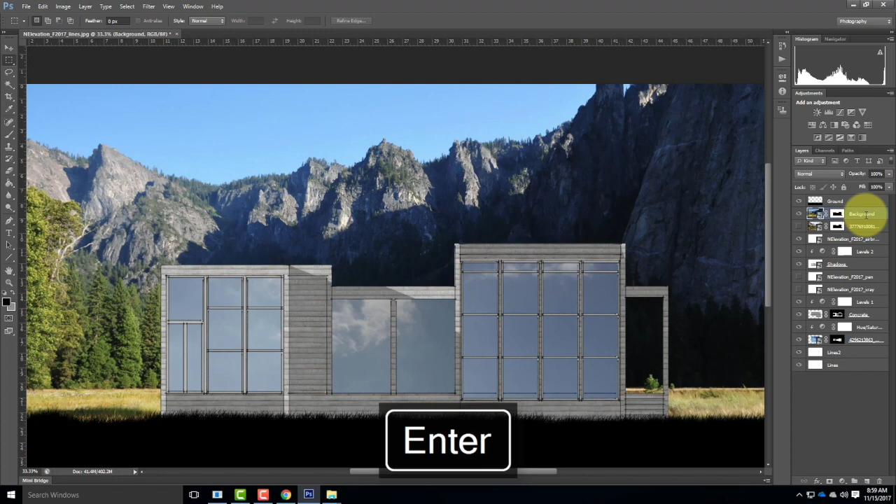So that's what I'm going to do on the background. Let me rename this to be background. You notice that I'm constantly renaming layers to keep myself organized so I know what's on what layer.

So in this context, I need to change the mask that's on this layer. Let me turn off everything else so we're just looking at this particular layer. Let me zoom out a little bit, like that. I need to work on just the part of the image that's selected here.

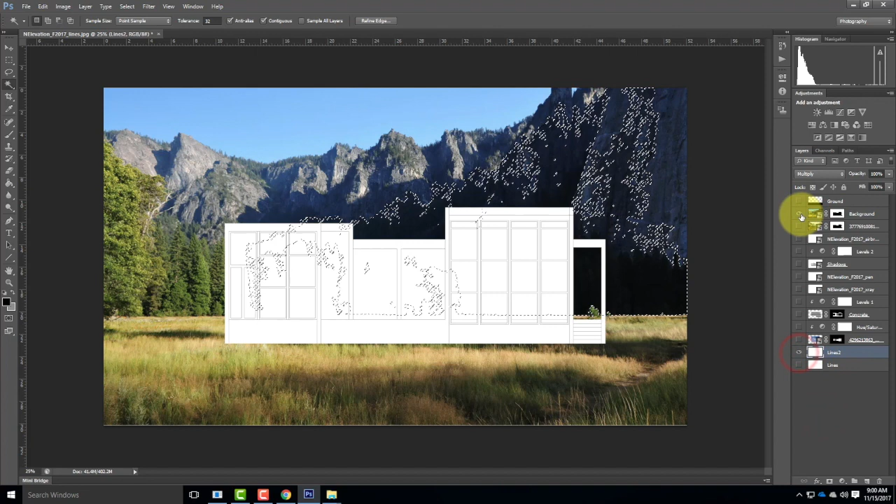So I'm going to use the magic wand tool, and I'm going to make sure that it's not going to—let me do it that way. Let me go back to my lines. I need to make a selection here so that I have just the background selected. I'll move back up to my background layer like this.

And I want to, on the mask, apply a gradient from black at the top to white, coming down a little bit here, so that the top of this image starts to fade away. I'll do that using the gradient tool, if I can find it. I think it's underneath—yeah, it's underneath the paint bucket tool.

I'll use the gradient tool. I have black and white as my two colors. I want black as the foreground, white as the background. I'll start right up here at the very top and draw a line, and this line represents the transition from white to black, or black to white. So wherever I stop my line is where it becomes not fully solid.

In this case, you may take a few tries figuring out how far down the transparency really goes. You may find you want it to go a lot further down. It's going to depend a little bit. So maybe about like that. It looks more extreme here because it's on the checkerboard pattern. When it goes into the regular background, it won't matter quite as much.

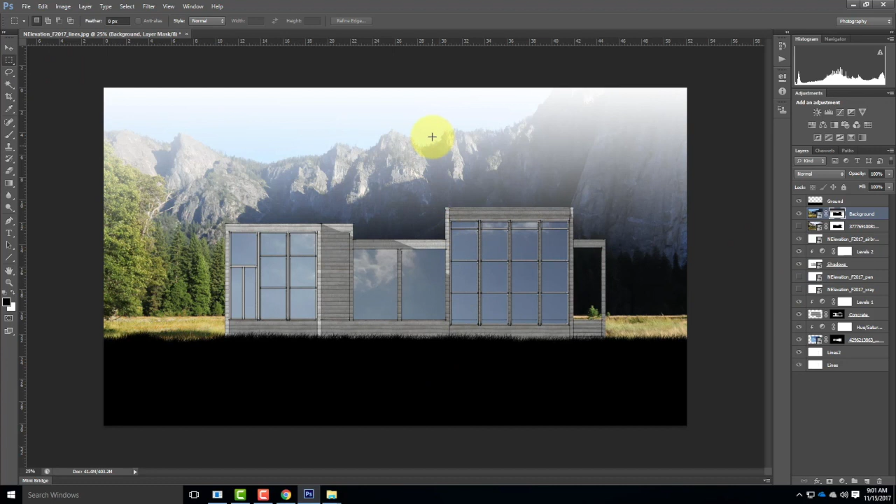Let me turn on everything else so you guys can see it with the rest of the stuff on, except I'm not doing the pen or the X-ray. Once everything else is back on, you can start to see that this just fades out into the top. The other thing that can help this not feel so locked in a frame is, instead of having the black ground, I could have this as white ground instead.

To do that, I'm just going to take the ground and apply an adjustment layer to that. Let me go to New Adjustment Layer, and do a Levels adjustment on that. Remember, I'm going to tie the two together. Control-Alt-G ties this to the ground layer. And I'll adjust my slider.

Oh, really? Are you not going to do it for me? How nice, right? There we go, wrong slider.

To white. So I just took the black background and made it white. Now if we look at this, this is a much lighter drawing. It doesn't have the big heavy drawing below it. So this still works because this is a nice sharp white contrast. It still works to tell us that's the ground. It's just stylistically different. I could also pick any value in between.

This is why I made it, sorry, wrong. There you go. Wrong one, it's the black one. There we go.

So I could decide, would I rather have it gray or do I want it all the way to black? Do I want it a little bit lighter? You could play with this. Okay, so in this context, I'm going to leave it white.

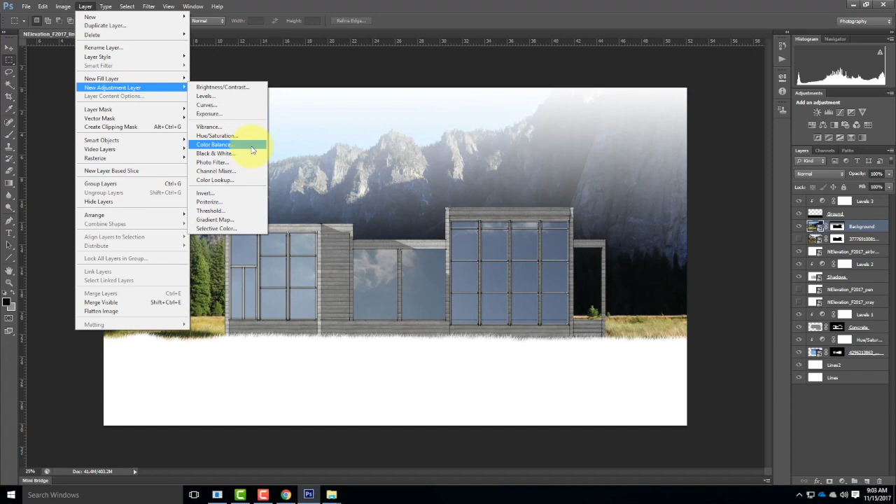So now this is showing with a white ground and a semi-transparent sky. I still could convert this background image into black and white if I wanted it to go away a little bit further. So I could add, let me go to Layer, New Adjustment Layer, and we'll do a channel mixer. I'm going to type Control-Alt-G, and switch the background into black and white.

Now the only thing that's popping out in this is just the windows. As you're going through these, you're making decisions about what looks better and what looks worse. You may find that, no, you know what, I really liked it when it was a color background. Maybe you really like it when it's a black and white background. You have to figure out what the right look is for your overall board. Now for me personally, I would probably put a little grunge in there too, but I think that's too much for what you need to do today, so I'm not going to make you do that.

You will find that as I go into these, when I get to the perspective one, it's going to be like an hour-and-a-half lecture because I'm just going to keep adding stuff. But the point is that this is how you evolve these drawings. This is how, if you have these basic steps, these basic skills, you can try it, decide if you like it or not, and then move forward from there.

So, again, give it a shot. Today is a free day to explore. You try these, you figure out what looks good, you delete, you edit, etc. When it gets time for your final version, the one you're going to turn in to me as part of assignment 106, assuming you're going to do an elevation, you're going to distill it down into what's the best looking one, what looks best for what I'm trying to show. Does that make sense? All right, I'm going to turn you guys loose. Let me know if you have questions.